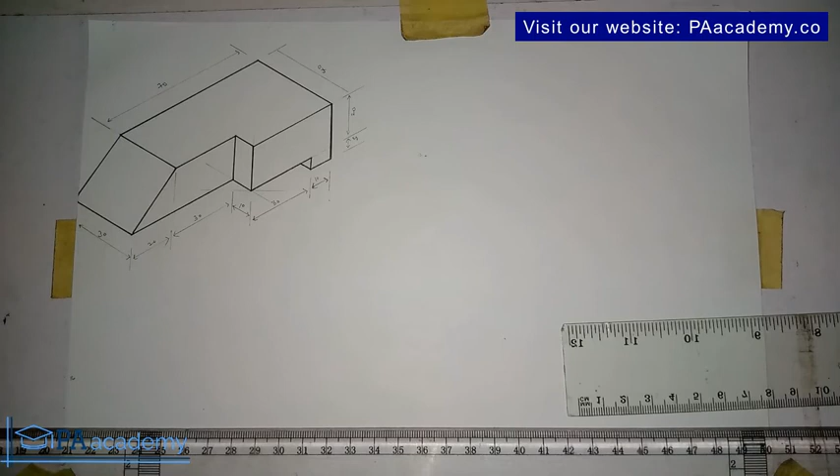This is video 16 under the video series Isometric Drawing. If you look at what we are having here, this is what we are going to be replicating in this particular video. We are going to be replicating this isometric drawing.

Now if you look at this drawing closely, you notice that one of the sides is not really at an angle of 30 degrees, which is one significant thing about isometric drawing. If you look at it closely, this particular line is not at 30 degrees, which is different from what we've been looking at in the past. So how do we go about something like this? We are still going to be looking at other drawings in which one of the sides is not exactly at 30 degrees in other videos, but let's look at this.

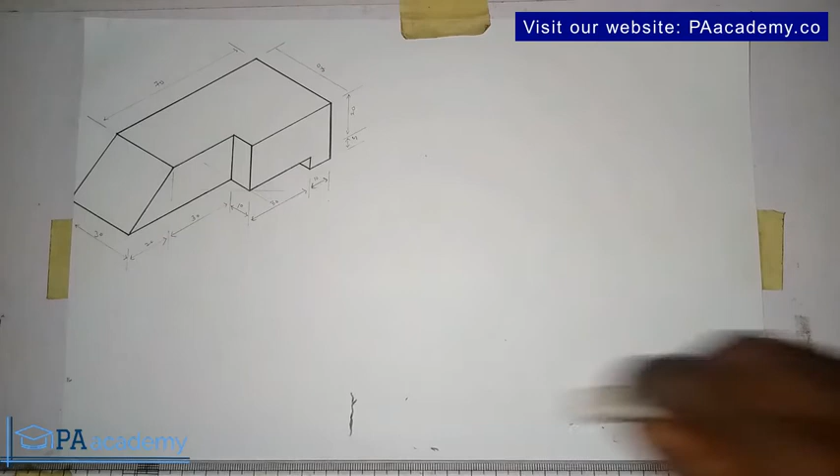So to start with this drawing, what we are going to do is draw a horizontal line. I already have my T-square, so I have my horizontal line. Let me take the line up a bit because of where I'll be starting from. So I think it's okay here. So I already have my horizontal line.

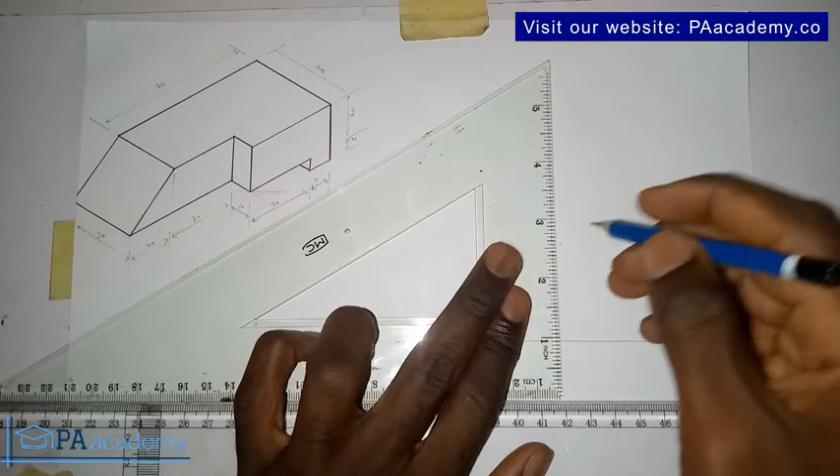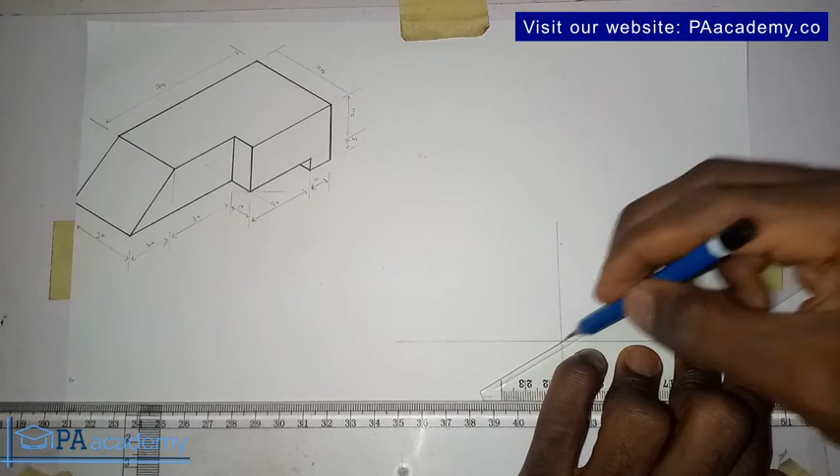Then I'll bring in my set square to draw the vertical line. So this is the point I'm starting from. From the point of intersection of the vertical and horizontal line, I'm going to have it like this, and then from here.

Make sure when you are doing it like this, you start with a faint line. Although my own line is not very faint, if I should make it faint, you might not be seeing it. So now let's take some measurements.

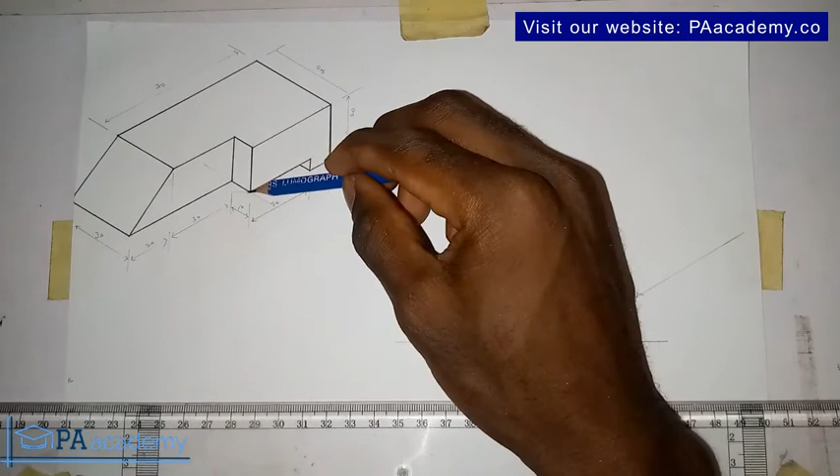If you look at the distance from here to here, which is indicated here, it is 20 millimeter, while from here to here is 10. And from here to here is 30. So let's take note of those measurements.

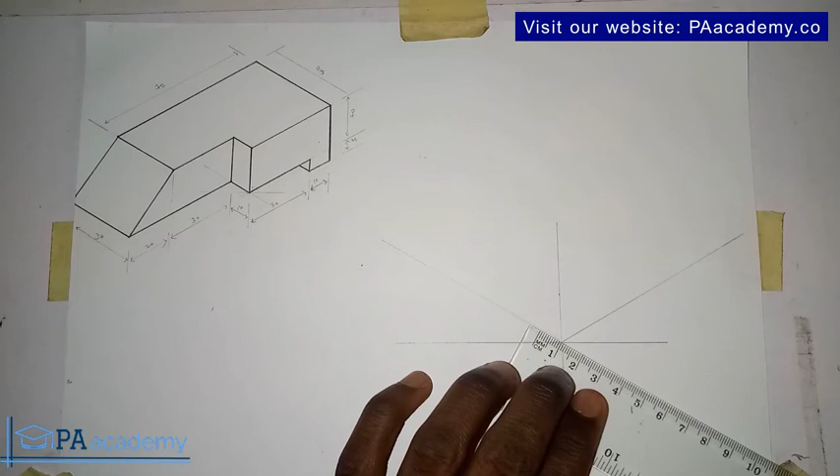So 2 centimeter, which is 20 mm, and then on this side we have it to be 10 mm. And then here we have it to be 30 millimeter.

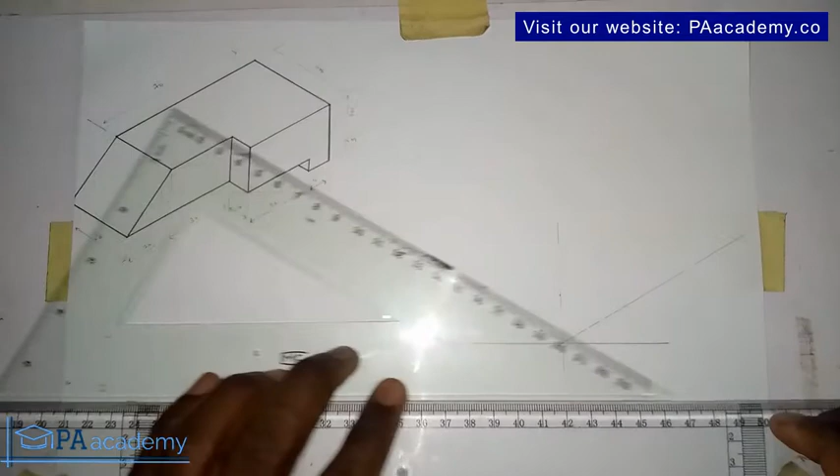So I bring back my T-square. I want to draw this line from this point to this point, with a faint line.

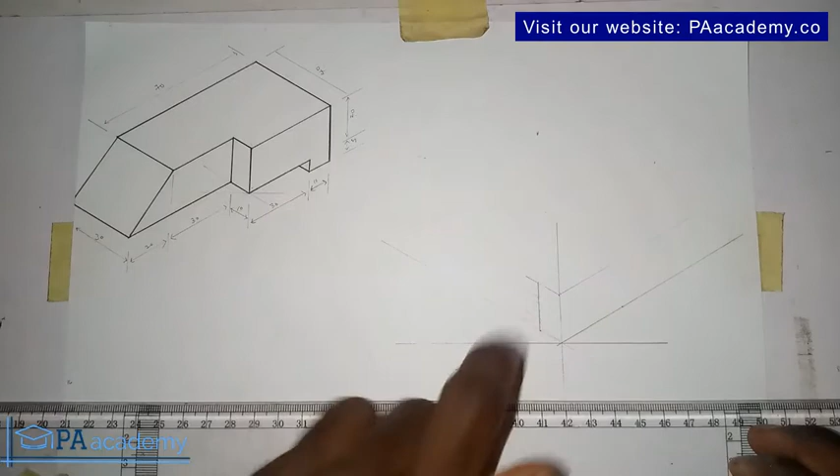Since we've already measured here to be 10 millimeter, we will bring back. So from here, we are going to draw a vertical line. Now we can draw this from here to here and then do this, straight down.

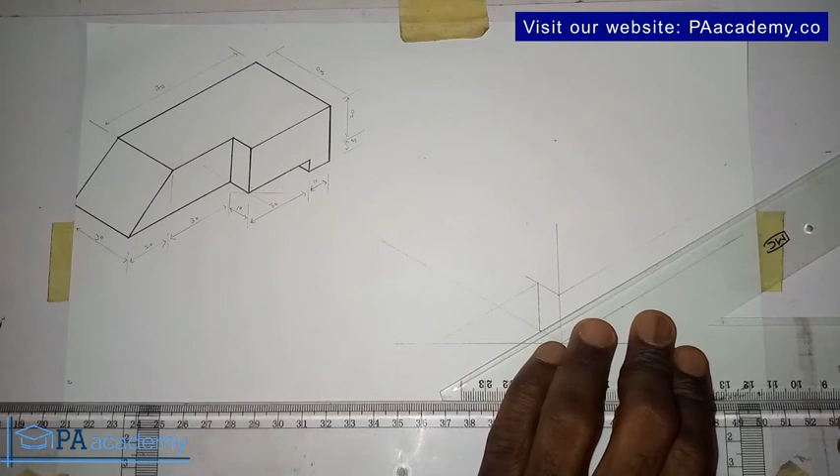So let me bring down my T-square. So from here, take it down.

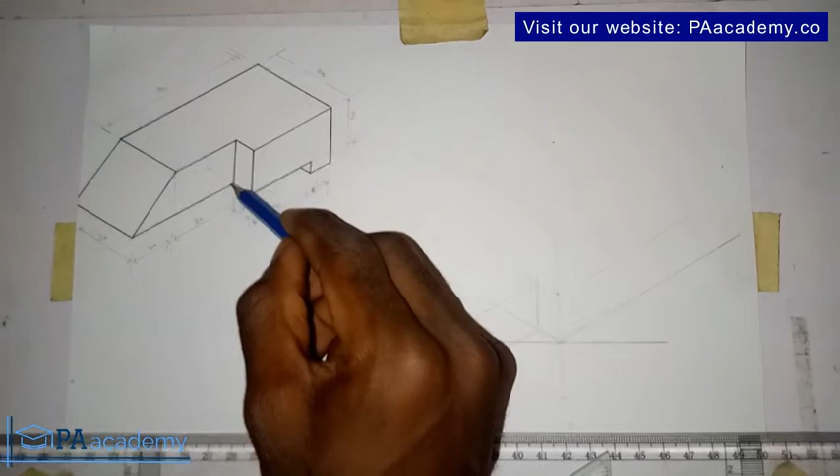So now let's take a measurement. From here to here is 30 millimeter, while from this point to this point is 50 millimeter. So let's measure that. This is 30, and then this is 50.

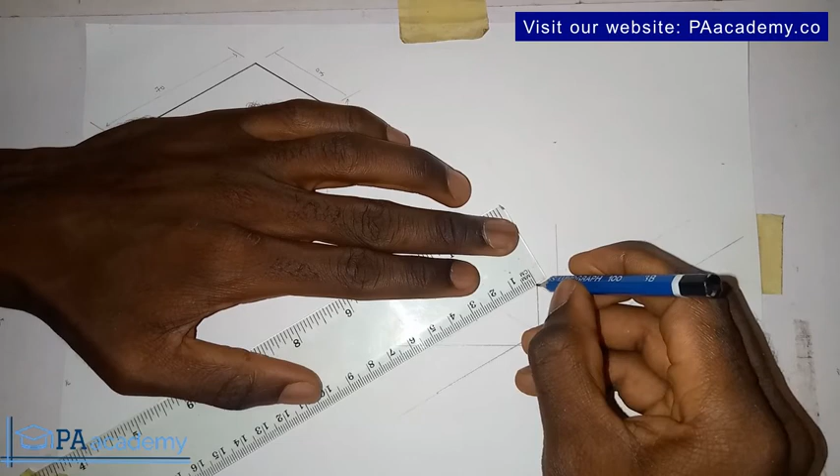So you can make that portion bold, you draw it with a bold line, like this. So what we do now is to just join it. This time around we don't need a set square. Since it's not at 30 degrees, we'll just join this to this.

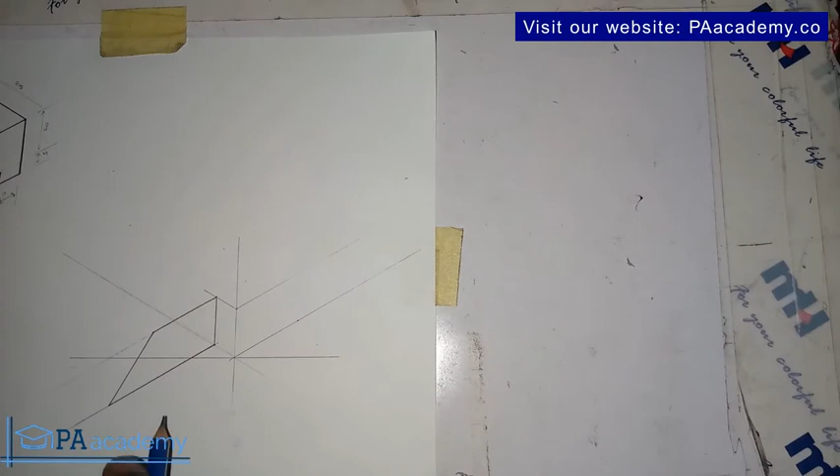So let me move it away from where my flash is so that you can see it. Once the flash from my camera is looking at it, it will look light.

So now I bring back my T-square and then my set square. Now we place the set square in this position, and from these 2 points we are going to draw a line.

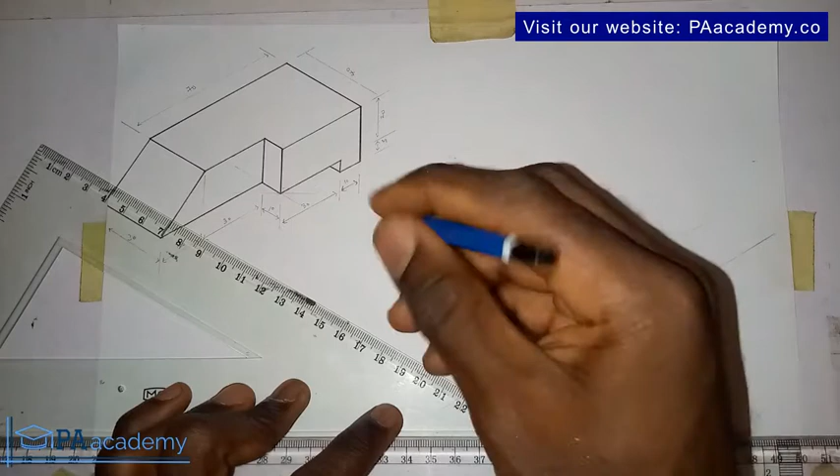So from here, and then from here, what that means is we are going to look at it from here to here, and from here to here. You can see the length is 30 millimeter.

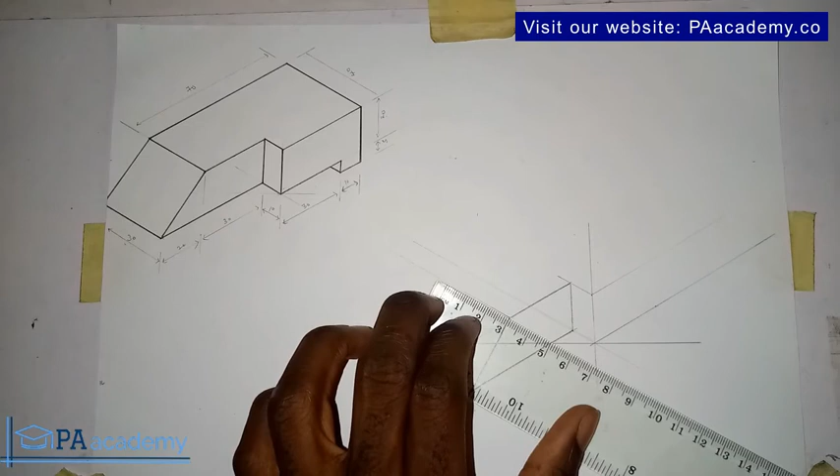So let me measure it. This is 30, and then we are going to measure the one at the top also. Don't forget, that's because it is not at 30 degrees, so we have to measure it. If not, we would have just used our set square and T-square to just draw it out.

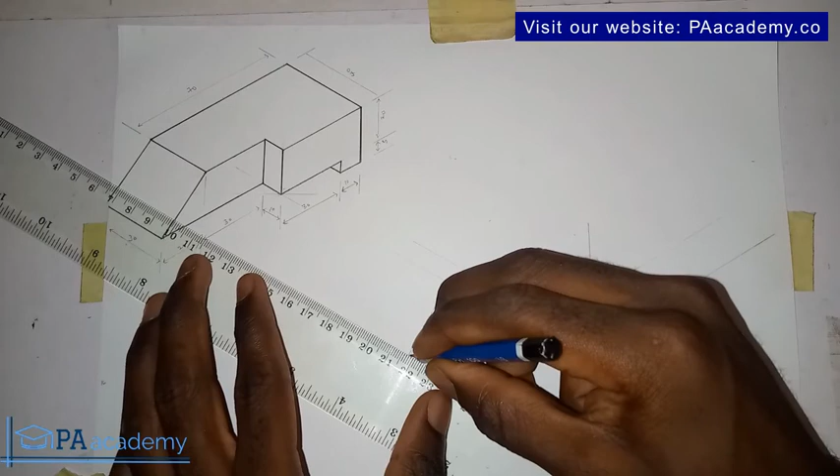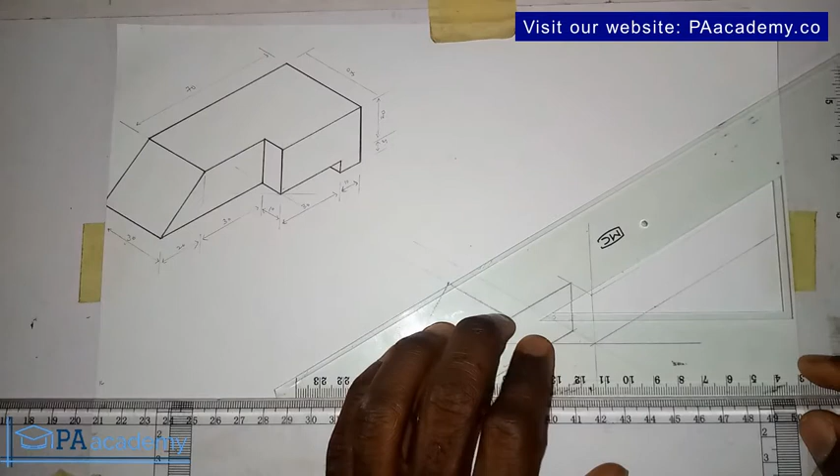Alright, so now we introduce the set square again. So from this point here, this point we are having here, this is it here. So we draw that line. From this point to this point is 70 millimeter. So let me measure 70 millimeter on this line.

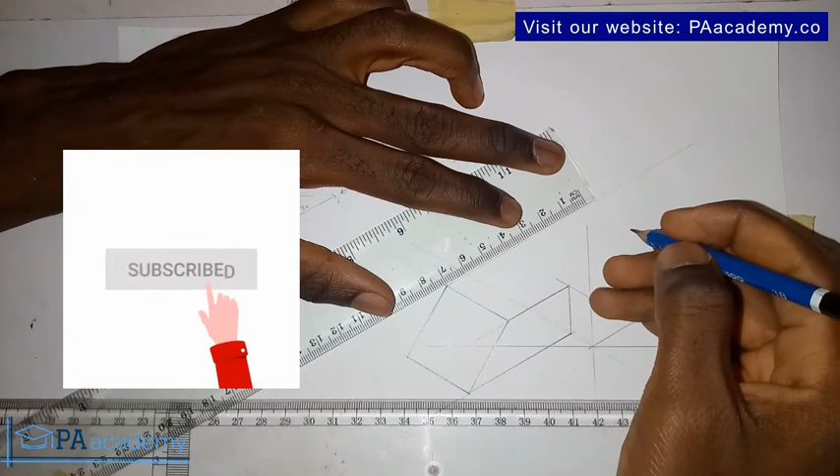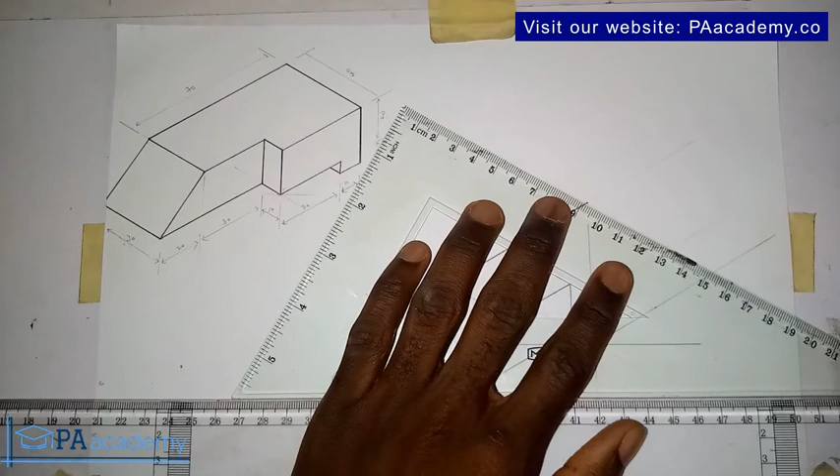So let me go ahead and just make this one bold. This is 70. So I bring in the set square, I will adjust it to this point, and from there I'll draw a line to come and touch this particular line here. So this line that we've just drawn is touching this particular line here. Remember this line we drew earlier after drawing this vertical line and measuring it.

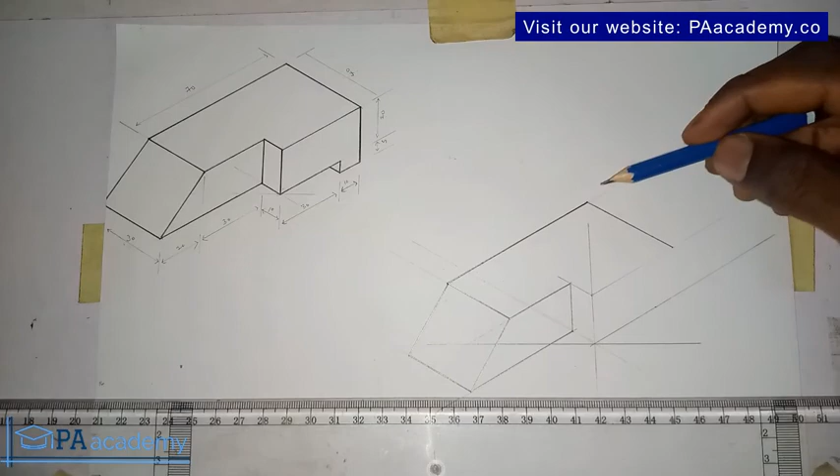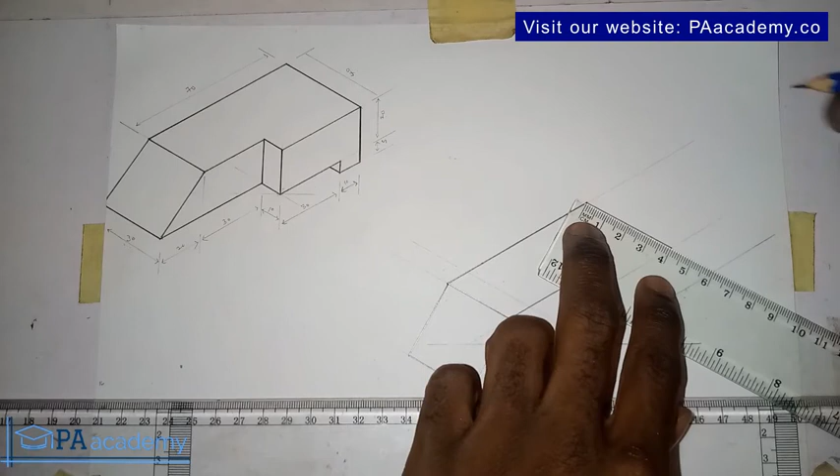Now if you look at it here, look here. From this point to this point is 40 millimeter, that's 4 centimeter. Now, just from this point, I brought in the set square, and I was able to draw this line to come and touch this particular line. Now, if you look at that, means we didn't measure it. But now, if I should measure it, you see that it's giving us 40, and that's the beauty of isometric projection. If all your lines are right, your constructions are right, that is what you will get. You just see that by the time you start doing some projection or drawing some lines, they will automatically fall into the right measurement. You can see 4. So if you do this and maybe you are not getting 4, yours is more than 4, that means there is a mistake.

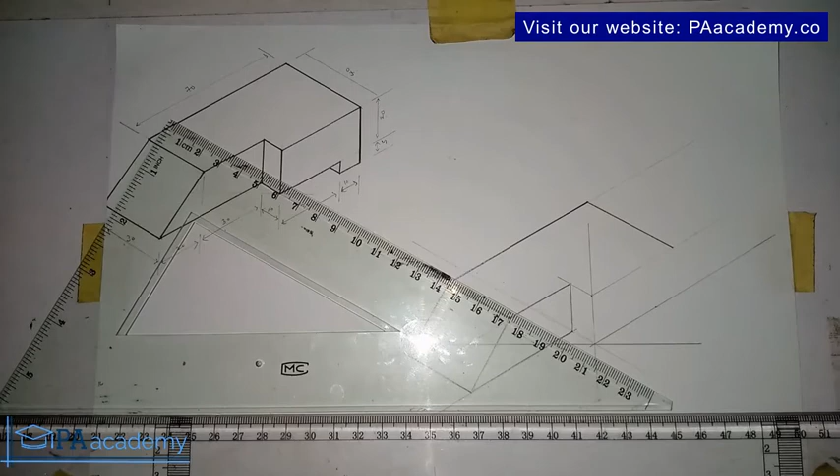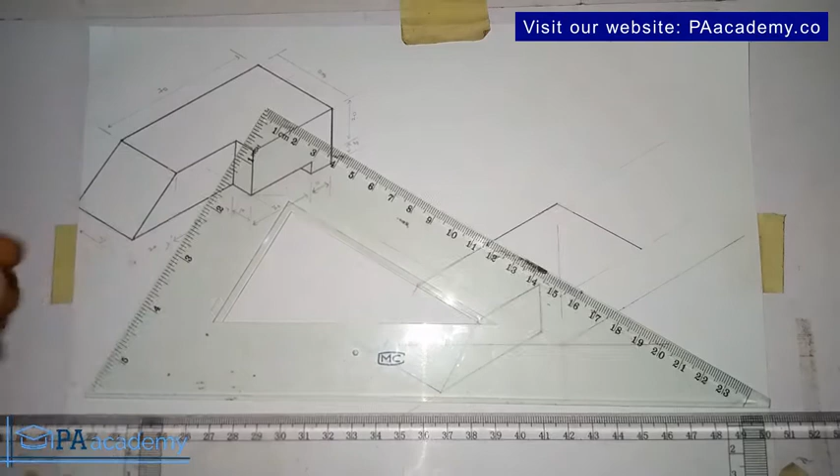So that's why I always emphasize that whenever you are dealing with isometric drawing, always make sure that your set square is sitting properly on your T-square, and your T-square itself, let me show you, is on your working edge, properly placed so that it won't be shaking. So those are the things that you have to pay attention to if you don't want some of these little mistakes that can affect the outcome of your drawings. And another thing you need to mention here is that sometimes if your T-square is not properly placed on your board, you can have a situation whereby your set square goes slipping under your T-square, and it affects your results. So that's just some tips for you.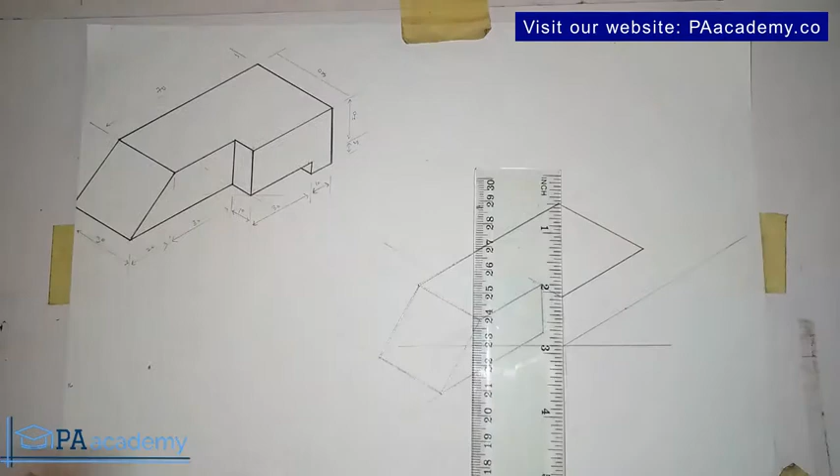So at this junction, I can now draw this line to this point, that is from here to here and this. So let's do that. Then we join this to this. You can go ahead and make this with a bold line, a thick line.

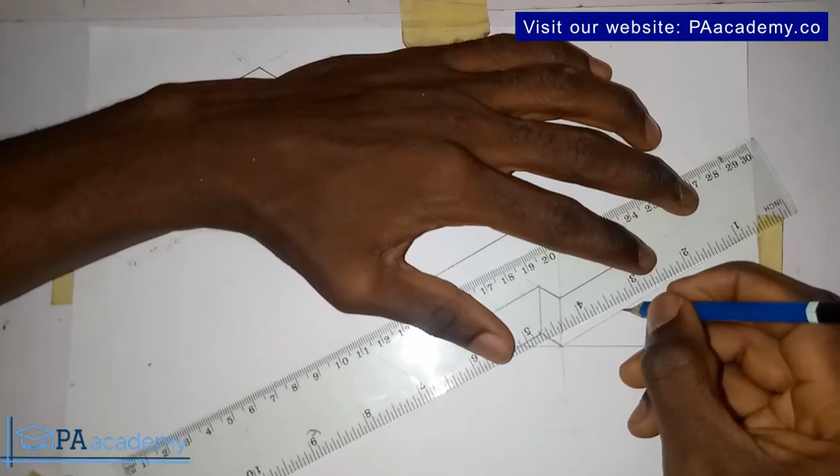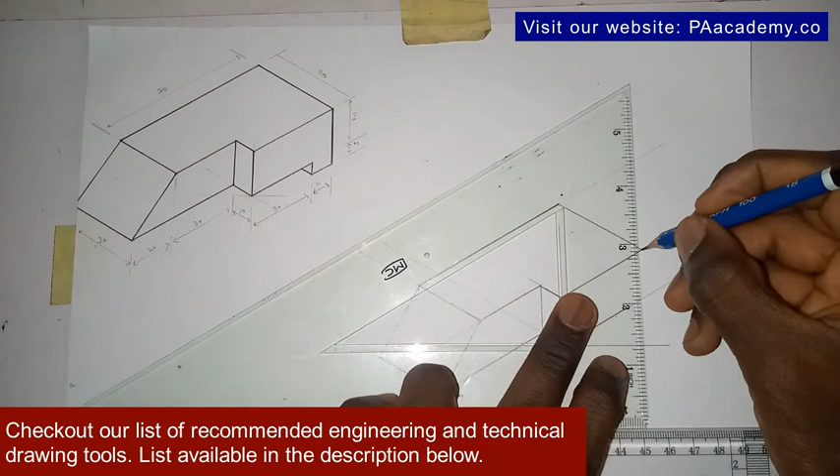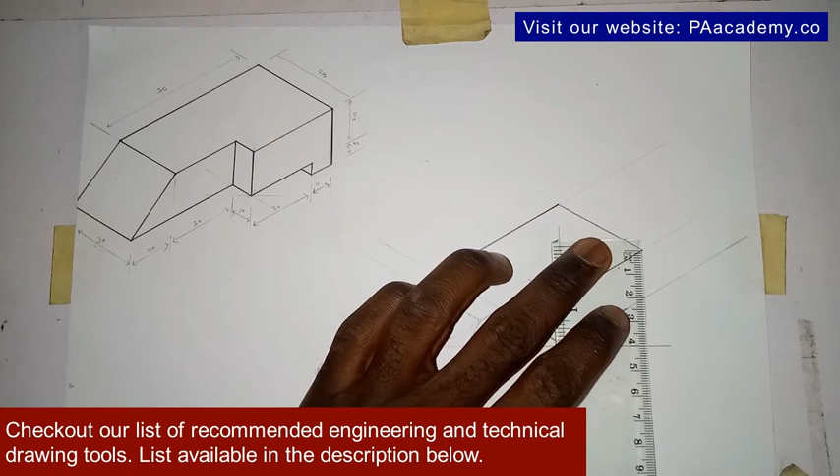So what is left now is this part for us to do. So I bring back my T-square. Now I want to draw this line. This line is 25mm. So I bring in my set square, I put it in this position, and I take it to the end, to this point here, and I draw a vertical line. So this vertical line that I've just drawn, I'll measure it to be 2.5 centimeter, that's 25mm. So this is it.

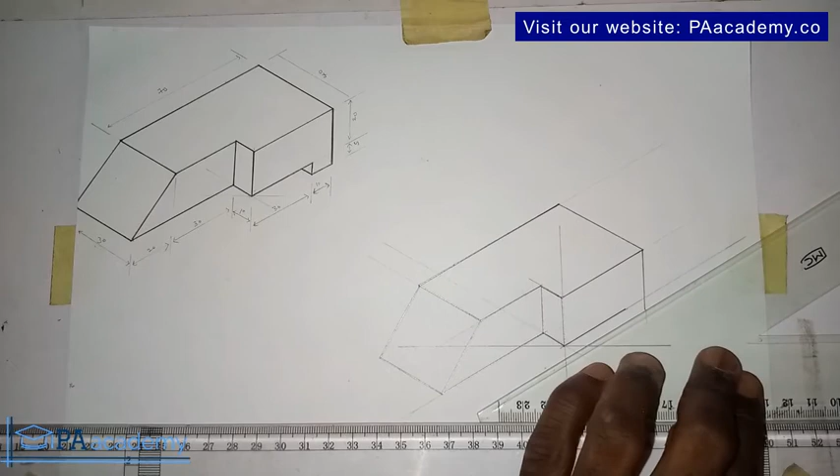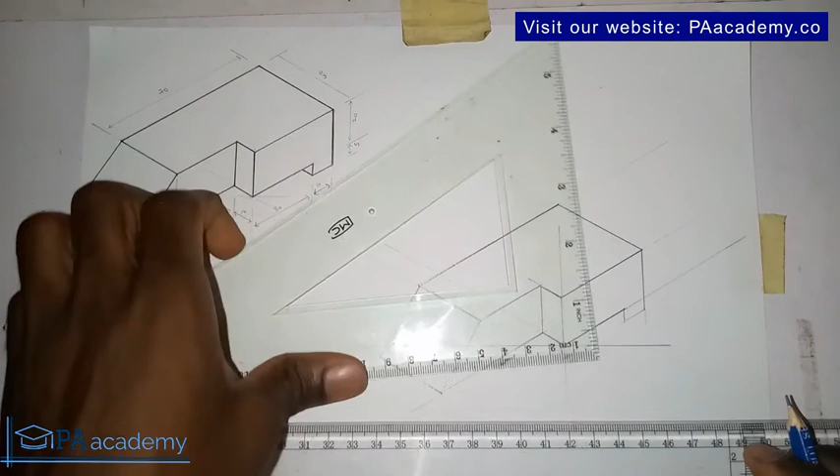So I haven't gotten that. So you adjust your set square to that point. Draw a line like this. And then from this point here, now this point here is the same thing I'm having, is one here. So we draw a line down to meet with that line. Now you turn your set square, and from here, so this line I've just drawn, this is it here. So with this now, we've been able to replicate this particular isometric drawing.

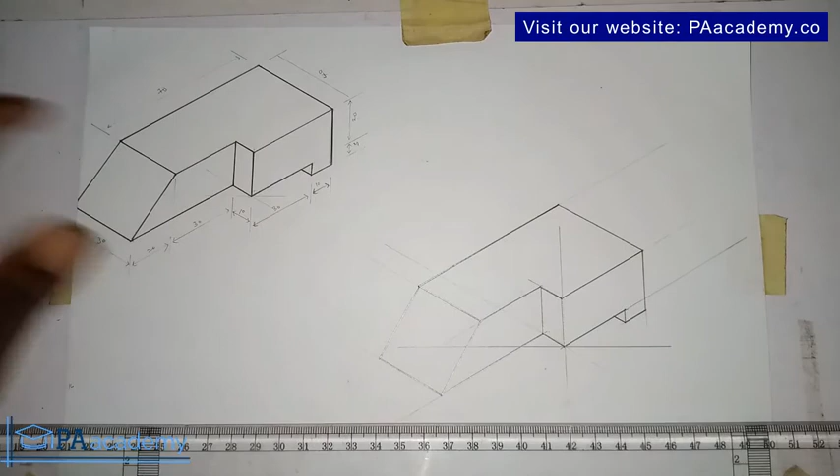So let me just move it away from the flash so you can see it properly. So we've just done by replicating this. So let me quickly add the dimensions.